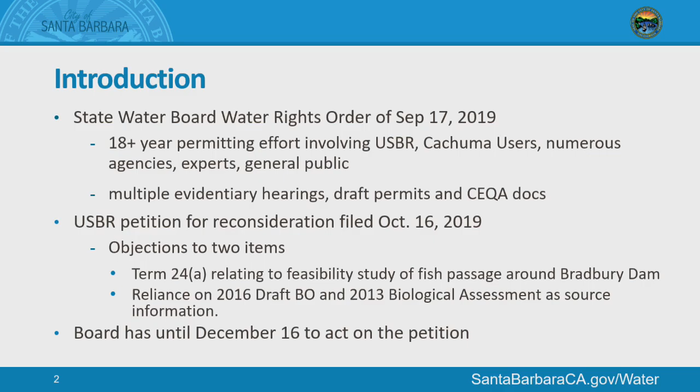You don't want to use something that's really outdated and refer to it as the best available scientific information. There are scientists who disagree that it's the best available scientific information. So the board has until December 16th to act on the petition. Don't know what they're going to do. They may just not do anything. In that case, the time period within which the Bureau could file a challenge would start running.

So let's talk about the operation of Cachuma very briefly. By way of background, the Cachuma Reservoir is operated and has been operated under kind of an existing permit regime as we were going through this 20-year process of getting a new permit. And essentially, we've been operating under a 2000 biological opinion. The dam releases under the existing flow regime calls for water right releases to protect the interests I talked about before, which are the downstream senior water rights, and also fish releases that are necessary to maintain the species according to a particular flow regime.

In the above normal and wet years, which are part of the classifications, additional water volumes are released in order to protect the public trust interests, which translate to steelhead. So that was what they were trying to do. The releases in the above normal water years, and that would also include the wet, have to be sufficient to sustain target flows at two specific measuring points that are downstream of Bradbury Dam.

The amounts are specified in the order, but basically the idea here is that during the periods of above normal rainfall and wet years, more water gets released than would otherwise be released under the existing operating scenario. And why? Why?

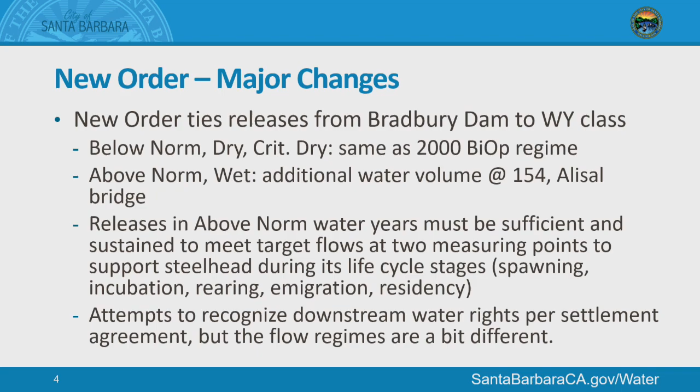So this is the basis of the new order, which I mentioned before was option 5C. And they do a look ahead to a hydrological record based upon water year classifications, as I mentioned before: wet, above normal, below normal, dry, and critical. And what you'll notice is that the water year classification is based upon inflow into Cachuma.

In other words, the amount of water that's fallen on the ground upstream of Cachuma flows into the reservoir, and that amount will tell you what kind of year that is going to be. And it's measured, as I recall, October to October as the water year. I've had that explained to me a number of times, and it gets very difficult and very complicated. But basically, the idea is to capture the rainfall cycle and the dry cycle within California's climate as a statewide basis. So that's the basis of the order.

The flow regime changes, and Commissioner Jordan, or should I say almost future Commissioner Jordan...

These are the purposes of the releases during various time periods, and as you can see, there are different amounts released in above normal and wet years for different purposes. Our fish biologists participated in the hearing and have some different views as to whether or not this will be an effective means of protecting and encouraging the fish. There are differing viewpoints on this, and so the State Board came up with this particular flow regime in order to protect the fish.

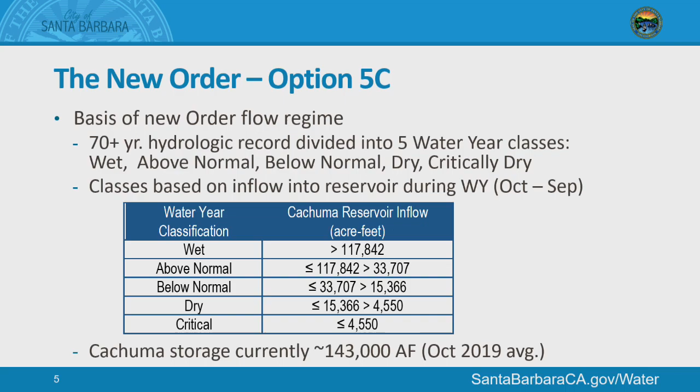Is this measured per day? It's cubic feet per second, CFS, and it's done during those particular release periods for those particular purposes. So if you go backwards, say you've had a wet year where you've had greater than 117,000 acre feet of water inflowing into Cachuma, then the releases during these particular points of the month are based upon that CFS for those purposes.

Do we know what it sums up to in a year, how many acre feet? I'm going to get to that a little bit. They can do the calculations. I don't have that on my chart, but I do have the impact of the total order as modeled by our expert water flow modelers. It's not an easy calculation, I can't do it off the top of my head. If I would have done math, I would have been a doctor.

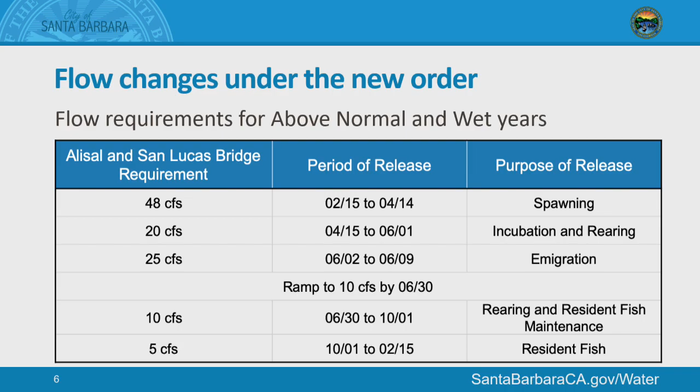A couple more questions. Just a second, we got Dan, a couple more questions. Hang on, just, and this is trivia, but in terms of the measurement, is that a dynamic measurement over the year, or do you basically measure at one point in time and then that regimen goes into effect for the next year? How's the measurement at the bridge versus the release of the water, is it a dynamic thing over the year?

Or is it a one-year measurement which then moves? Do you know, Joshua? If we don't know, we'll have to get back to you on that. I mean, is it leading, static, or lagging? I understand what you're saying. So whatever the year is determined kind of sets this up, and then it would be the following year. Yeah, it's a lagging release. Okay, right, good, thanks Joshua.

So we try to estimate the impacts of this regime versus the existing flow regime under 3C. And the impacts that we averaged over the entire period of the 70-year look forward was about 200 acre feet a year average over the whole period.

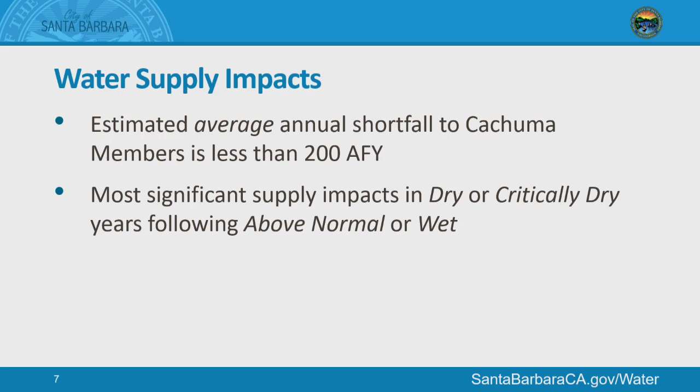Now what does this mean in potential operational reality? Well, because you're releasing more water in the above normal and wet years, you're potentially creating a situation where you're drawing down the reservoir more than you otherwise would. Under existing operations, it stays in the reservoir and can get carried over for other purposes from year to year, and you just have more water in the reservoir. Well, now that water gets released, and there's a potential impact related to if you have a wet year with a lot of releases followed by some dry years, how does that get refilled and how does that get carried over a period of time? And so that's going to be the critical issue as we're moving forward.

The State Board order does keep itself open for adjustments if necessary, and the main provisions keep it open for adjustments to protect fish. But the reality is that if we need to reopen in order to protect people and drinking water, we can do that as well. You go in and petition to amend the permit.

So this is basically just a summary sheet of what I've been talking about. The board order requires higher flows during a period of greater rainfall to improve fish flows. The water supply impacts are going to be the greatest in dry and critical years that follow above normal water years, the above normal and wet years, those two years.

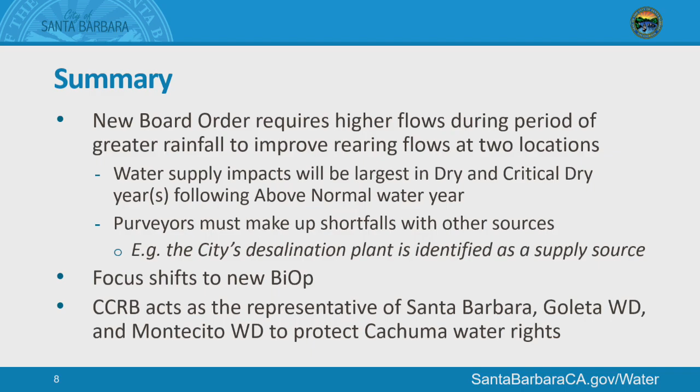They recognized at the state board hearing, and we objected to the inclusion of the reference, that the state board does not have any direct control or permitting authority over that water supply. But that said, it is something that gets taken into consideration when evaluating public trust interests.

A prime example of that is the Audubon case that dealt with Mono Lake and the need to keep Mono Lake full, meaning more water in Mono Lake and less water to Los Angeles. They had to make up for that loss by other sources, including conservation and other water supply activities in the city. That's a traditional public trust analysis, and that's what the board did.

With regard to this, in the course of what I'll call litigation, we do have a JPA that's been organized to protect water rights in Cachuma and downstream of Cachuma — the Cachuma Conservation Release Board. Councilmember Snedden is the city's designated representative to that JPA. The other members are the Goleta Water District and the Montecito Water District. It has a different purpose than COMB.

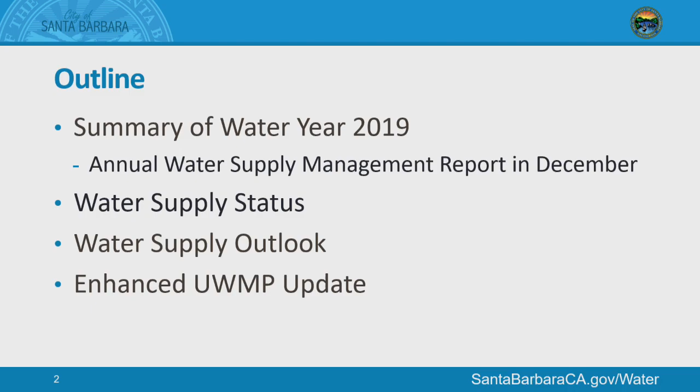Then we'll move into the status of each of our individual water supplies, where we stand right now. From there, we'll take a look ahead three years—where do we see ourselves with water supply moving forward? And finally, I want to provide a brief update on our Enhanced Urban Water Management Plan, formerly known as our Long-Term Water Supply Plan.

Okay, so first, when we're thinking about how we used our water in water year 2019 - again, that was September 2018 through August 2019 - the first thing to consider in Southern California is always precipitation.

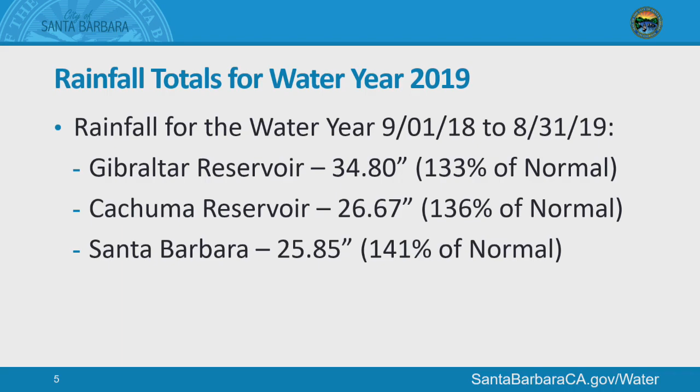So that kind of sets the stage for how we use our water supplies here at the city. This slide provides rainfall at a couple of locations important to the city. At Gibraltar Reservoir for water year 2019, we saw rainfall that was 133% of normal. At Cachuma, it was 136% of normal. And in Santa Barbara, it was 141% of normal. Pretty good year.

This graph shows how we plan to use our water supply sources versus how we actually used them. The bar on the left is our planned, and the bar on the right is our actual usage. The biggest takeaway is that Gibraltar filled and spilled in January 2019, which gave us a source of water we didn't anticipate going into the water year. We actually used 20 times more Gibraltar water than we had planned.

Gibraltar is represented by the gray-blue square. What that allowed us to do was leave a lot more Cachuma water in the lake, represented by the blue bar. So we currently have storage in Cachuma water over 22,000 acre-feet.

As you know, we've been resting our groundwater basins. We pumped them pretty heavily a couple years ago during our critical dry years, and we want to rest them so that they can recover. Desal's been a big help in allowing us to rest those groundwater basins. We had full production for water year 2019 as we anticipated.

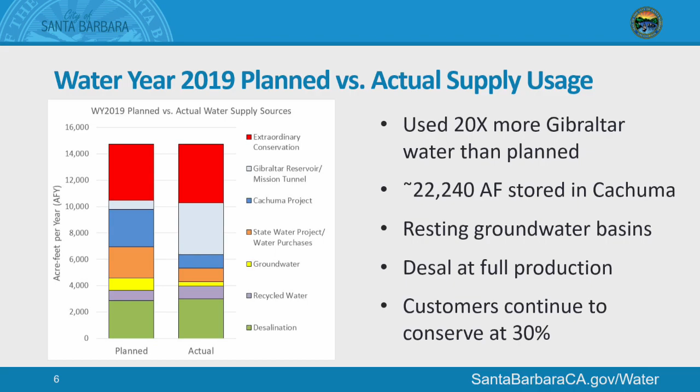I want to point your attention also to the red square, which is our conservation. Our customers have continued to conserve at a rate of 30% of pre-drought, or 2013, demands. That's been critical for allowing us to recover from the drought. So we'll dig a little bit deeper into those demands and that conservation.

I want to point your attention to the red line and the blue line on this graph. The blue line is our drought target, assuming 30% conservation from pre-drought demands. The red line is our actuals, and you can see they track very closely. So our customers have done a fantastic job meeting our conservation targets. You can see in the text that our 12-month running average conservation is 31%.

I want to point your attention to the point on the far right of the graph, above October 2019. You'll see that we also met our target in October for that month. However, if you look at the text at the top of the graph, we had only a 21% reduction for the month of October.

The reason I want to point that out is I'm actually redoing the targets for water year 2020. Now that we're in a stage 1 water supply condition, we do expect our demands to start to rebound a little bit, and we want to anticipate that. So we're anticipating that our demands will be more of a 20% pre-drought conservation versus 30%. Moving forward, that will be our target.

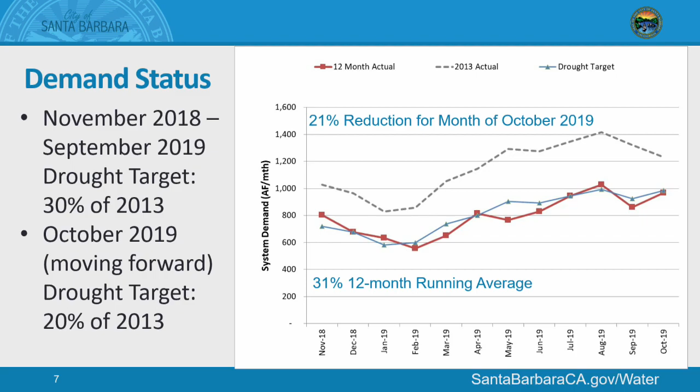Okay, so how are each of our water supplies doing? First, we'll talk about Gibraltar Reservoir. We currently have about 33% of our total capacity stored at Gibraltar, or 1,400 acre-feet. We are continuing to divert from Gibraltar.

The water quality is getting worse, as it does this time of year, so we're seeing increased turbidity and organics. However, it's not all that bad yet, and we're able to blend it with some of our other sources at Cater and produce still high-quality drinking water. We're going to continue to bring that water down from Gibraltar until we reach about 1,000 acre-feet of storage, or until the water quality gets such that we can't use it anymore. As we saw in that graph previously, this has been a really important source for us this year.

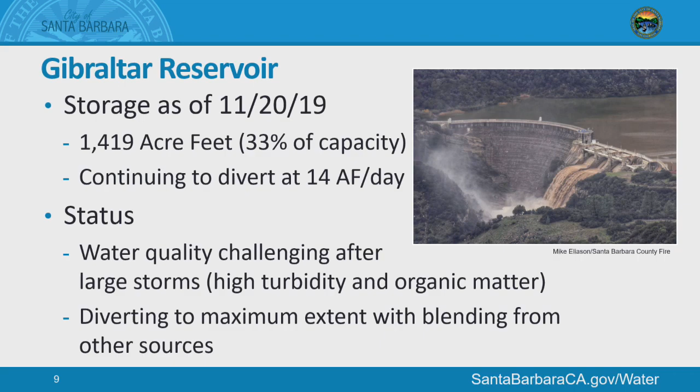As we talked about earlier, we have a lot of water stored in Cachuma. The reservoir is about 72% full right now from total capacity, at just under 140,000 acre-feet. Of that water in the lake, 22,240 acre-feet is allocated to the city. Because we just started the new water year in October, we were given our next year's allocation for Cachuma water in the lake, so our allocation is 8,277 acre-feet. We received 100% allocation, so that's included in that 22,000 acre-feet.

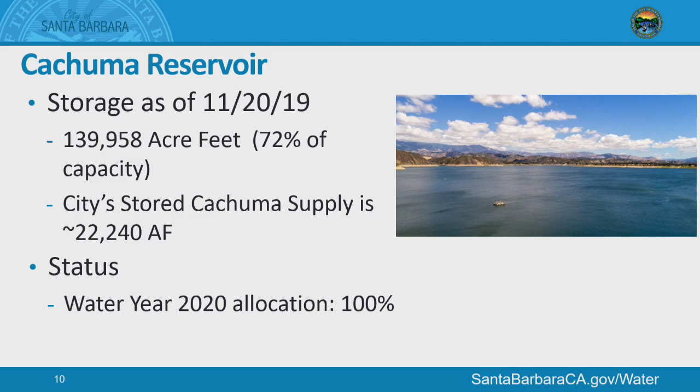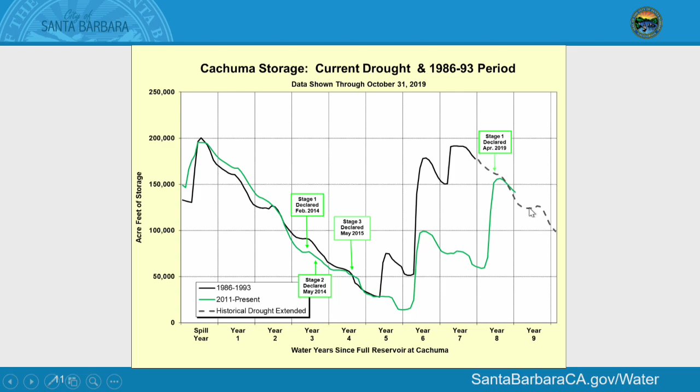In terms of our imported state water, we have a 75% allocation of our Table A amount, which gives us 2,475 acre-feet. Currently, we aren't able to deliver state water to Lake Cachuma. CCWA, the Central Coast Water Authority, is working on building a bypass that will pump the water up and over the dam and allow us to get it back into the lake. They were waiting for materials, and they also had a big shutdown, which was a big workload issue for them. The shutdown is finished, and I believe the materials are in or coming in, so they hope to get that project finished by the end of the calendar year.

We do still have some water debt on the state water project, about 5,000 acre-feet. We've paid back at least 1,200 acre-feet of that water debt, and we'll continue to do so as long as we feel comfortable that we have enough supplies and storage to meet our own needs here at the city.

Quick question. Is it possible to store water in the Santa Ynez Valley in terms of storing it in groundwater and then do some exchange with them, or some trading that could be done?

Not currently. In fact, CCWA is actually doing a study right now on what the groundwater banking opportunities are from the State Water Project turnout near Kettleman City all the way down to Cachuma, so they're looking at what banking opportunities exist. I think there's a lot of promise and hope that we can find some banking opportunities between the State Water Project pipeline and Polonio Pass, the treatment plant for CCWA. So there's a segment in there that would be actually pretty ideal if we could find some storage. But right now that's a study that's underway.

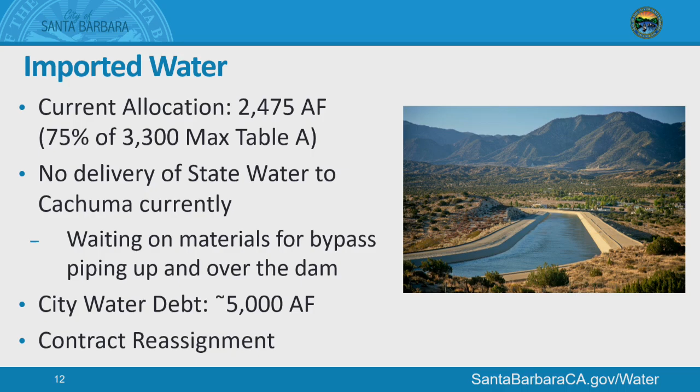One last thing about our state water: we are still working on contract reassignment. Currently the County of Santa Barbara is our water supply contract holder for our state water project water. We've been working through CCWA to reassign that contract to CCWA, and there's going to be a Board of Supervisors meeting on February 4th. The goal of that meeting is to work out any last minute issues in the draft agreement so that all parties can agree to move forward. If that meeting goes well, they expect to have a second meeting to adopt the agreement to reassign the contract sometime after that, after February.

For groundwater, as we've mentioned before, we are resting the basins, so we haven't been pumping our groundwater basins. We do continue to monitor seawater intrusion in our storage unit 1, and water levels in both storage unit 1 and Foothill, on a monthly basis. We expect full recovery of the basin to take up to 5-10 years based on our previous observations in the last drought.

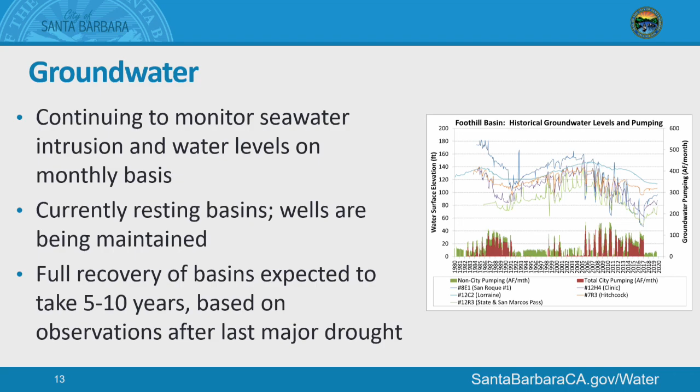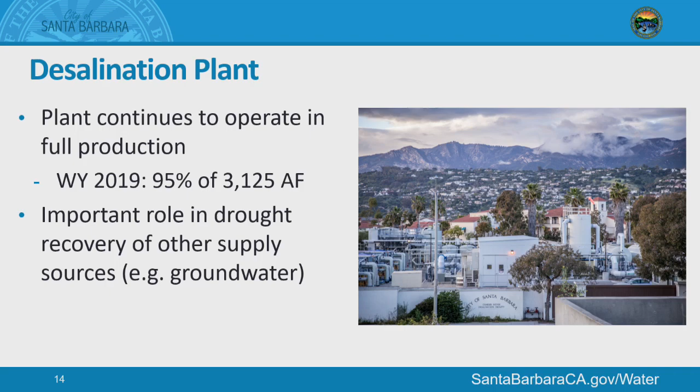Our desal plant continues to operate in full production. For water year 2019, we ended up with about 2,993 acre-feet, so 95% of the anticipated production amount of 3,125 acre-feet. Desal continues to play an important role in drought recovery because we have this consistent, reliable source of water, and we're allowed to let our groundwater basins rest and recover.

And finally, the recycled water plant is currently online and it's meeting our customer demands. We just finished a series of repairs and fixes to increase the capacity of the recycled water plant, and staff is actually currently load testing the plant to see what the new capacity may be after these repairs. So we hope to have more information on that soon.

We expect probably in early 2020 that we'll have that. We want to do probably at least 2 months of stress testing, and we're doing different capacities or different flow rates and obviously different types of cleanings to kind of optimize that. But hopefully at the end of this, we'll have an upper number of what we think the facility is available, and then what capacity may be available for sale if we want to go that route.

All right, so next we'll move on to the water supply outlook. As you know, at the beginning of the water year, we always assess our water supplies and we take a 3-year outlook. The idea with this assessment is that we're looking for a feasible worst case scenario. So we had a pretty good wet year last year, but what if we go right back into dry years, 3 consecutive dry years? This is a conservative planning effort, and the idea is if we were to encounter 3 more years of drought, would we have enough supplies to meet demands for our community?

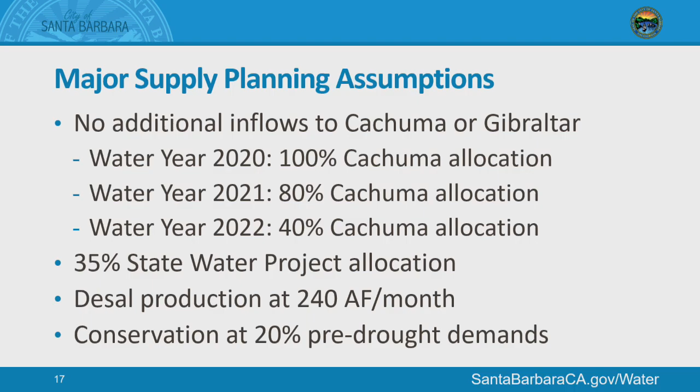When does that pre-drought baseline ever move down? We start out somewhere, we're where we are now after a wet year. You make the point in the staff report that if we have a couple of wet years, we never go back up to pre-drought demand. Do we then, at what point do we bring that line down for the new pre-drought number to start measuring conservation off again? That's one of the questions that we hope to answer as we work on the enhanced urban water management plan.

We have done some work with some consultants to evaluate what we think the rebound's going to look like, and their efforts suggest that we won't ever return to pre-drought demands. We think it'll be 10% less of pre-drought demands, and that recovery period is probably about 7 years, so we'll kind of slowly creep back up to that 10% less period.

And then we'll take what we've done with them moving forward into the long-term water supply plan and define a new normal. So when you do that new normal, then that 20% will erode down a little, to 15%, and then we'll work on increasing the conservation level back up off of the new pre-drought number, so to speak. Does that make sense?

It's tricky with conservation, especially in our community because they're so fantastic at conserving. At some point, there's demand hardening, and there's not much more water you can squeeze out. Could be actually that way in the future as all the easy pickings and the lawns disappear. Exactly. You end up with less potential out there to try and maintain the same conservation level. Yeah, so at some point, whenever, if the world continues the way it is, those two lines come back together, and then we've got some real hard issues again on how to conserve off of the new reality. That's correct.

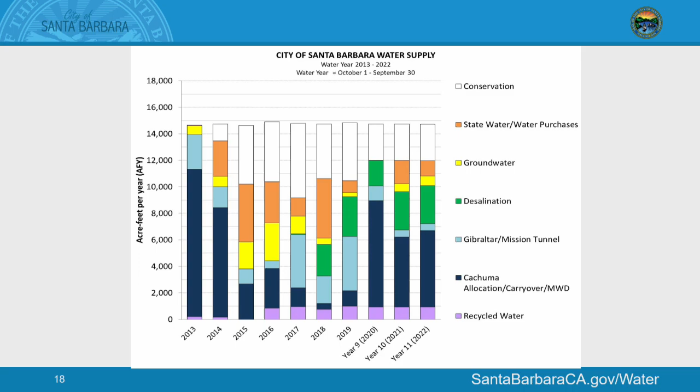And the mix looks pretty similar. We'd still be relying heavily on Cachuma and desal, a little bit more state water, and we'd still be using just a little bit of groundwater in the summer to meet peak demands.

So we did speak with the chair and vice chair about this, and we're still working with this graphic. We do want to be clear as we move forward about what water the city, if this agreement were to be signed, would have control over - how the city supplies water to its customers - versus this water that we're now obligated to provide. But this graphic clearly shows all of the demands that the city has. So we're working on how best to portray that information and have that conversation with the community as we move forward.

Just a quick question - on 2022, does the Cachuma allocation go up from what the previous graph showed, or no? I couldn't tell, I don't remember. There's a little bit more Cachuma water used in 2022 in this graph than in the other.

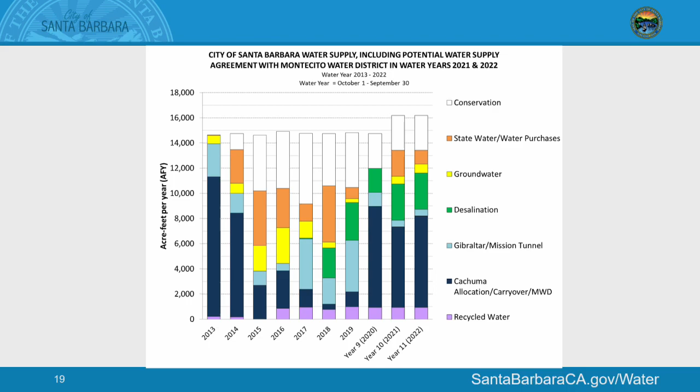Right, because as we get into 2022, much of that water is carryover from prior years. Thank you, that's correct. Okay, so our conclusions after going through this supply planning effort, as I said earlier, we do have sufficient supplies to meet demands through water year 2022.

Some important things to consider: I didn't include desal expansion to meet those demands, and I also didn't include any supplemental purchases of the state water project. So should things get even worse than my worst case scenario planning, we're not totally stuck. We have some other options available to us, although there's some lead time, of course, to expand desal.

We also have sufficient excess supplies to meet demands of the water supply agreement with Montecito Water District, should it be approved. And then finally, we wanted to address the current Stage 1 water supply condition. We think that remains appropriate because our groundwater basins still have a lot of recovery left, and we'd like to keep that in place. After this next rainy season, we'll see where we stand, and we can revisit that in the spring of 2020 and see if it's still appropriate.

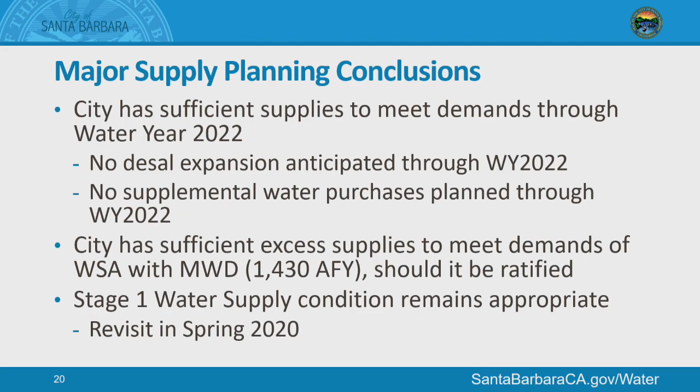So, yes, Arturo, a couple of questions. The first one is: where do you see Cachuma being at the end of those 3 years with your assumptions that we get no more water and we're drawing all this down? How much would we have, roughly, in terms of our availability, allocation?

I believe that we were down to a couple thousand acre feet of Cachuma water and virtually no state water. So again, this is a worst case scenario, and I did really drive those sources down.

Okay. And then the second question had to do with conservation. So now we're not in Stage 2, we're in Stage 1. But do we still continue the conservation programs in terms of incentivizing people to continue to conserve lawns and things like that? Yeah, absolutely. All of our conservation programs are still in effect.

And those are always implemented based on the avoided cost, so it's still cost effective for us to implement those programs. We've still got field staff going out and helping people figure out where they've got leaks. We still have rebates available, and those programs will continue.

I think one of the things we were challenged with as a commission as we got into this is conservation is a way of life here, that is normal. And when the drought started, we had been talking about enhanced conservation. Maybe as we go through this update to the Enhanced Urban Water Management Plan, it's trying to clarify what that is that we're asking for the community—an effort above and beyond what we consider to be a way of life here, which is always being sensitive to your use of water, but then taking it to a whole other level when we get into these long, prolonged drought periods.

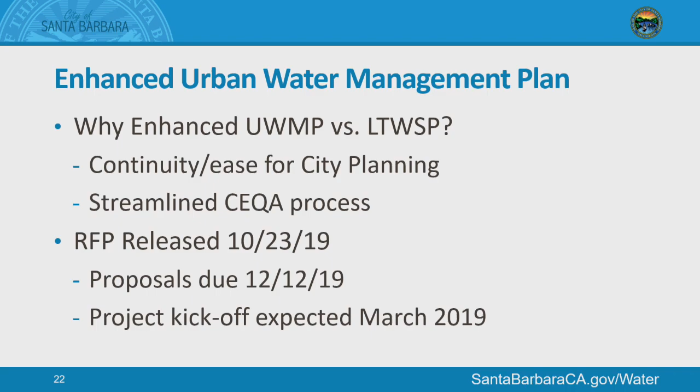I'd be interested. I'm not going to be here next meeting, so I might as well say so. Oh, okay, great. I am too, but if there's one, I'll let Dr. Keller do it. Are you interested? I would do it too, but however it shakes out. Okay, let's talk about it at the next meeting.

Great, all right, and that actually concludes my presentation. So if you have any questions, I'm here to answer them.

I should have a couple comments back, really to the last section, and Joshua's heard this from me before, but I'd continue to be interested in whatever process discusses getting rid of that white section at the top of the bars and having a new normal. Because what's really concerning to me in 10 or 15 years is what happens when you have to start conserving into today's demand, not yesterday's demand, which is still what we're showing at the top of those bars, and what will those look like, and can you plan for that?

And the other one is, do we ever discuss, or do you ever have a plan, that use of groundwater is the last choice in the water supply? If demand doesn't reach where you projected in the other sources, so you have an excess of, say, desal, would you get rid of those yellow ones as the first source to go in subsequent years? Is that something we consciously do, or care about? Yeah, the 7 to 10 period while we're recovering.

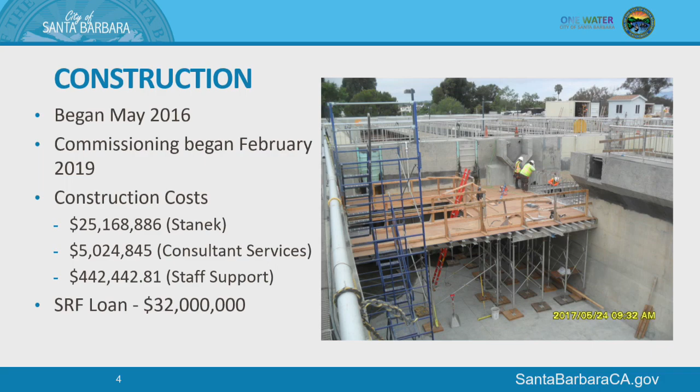So the project goals were really to change our process.

We went from carbonaceous mode to a nitrification, denitrification mode, and with that we wanted to address some issues and distribute flow equally into all of our basins. That was one of our hang-ups, we never could distribute flow equally.

So the picture here is what we call our octopus. That helps us really closely monitor the gate so flow can be distributed equally throughout all 6 basins.

We also had to upgrade a lot of our existing equipment, because our equipment is old and failing, or it's no longer efficient or obtainable. We had to buy a lot of our parts on eBay and really just try to hold things together.

So we also wanted to provide redundancy in areas that we were lacking and were kind of at risk. This project also addressed any odor control issues that we were having. With the nitrification, it really cut down on a lot of the odors in the primaries.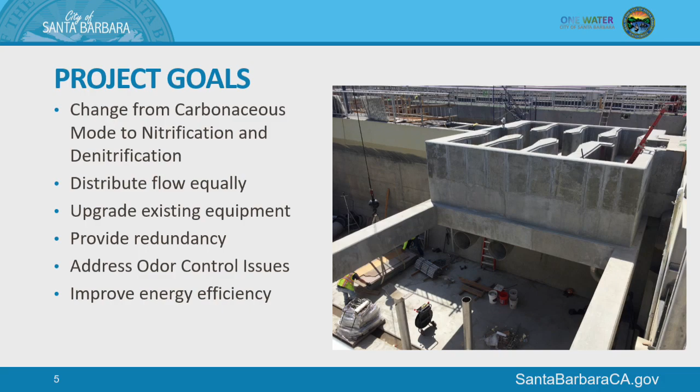As a fun fact, the blowers are the single largest users of energy in our wastewater treatment plant. The need for constant and significant air to keep that dense biological activity going is significant, and they were a significant cost as well. They were a million dollars each, so yeah, they're pretty impressive.

Operations, all right, this was a very successful project. We improved our turbidity, the clarity of our secondary effluent to 1 to 3 NTUs. That has a significant impact to our tertiary operations, and because of that is why we're able to do the testing at tertiary right now to see how much we're able to produce. It also obviously improved our flow to our basins, which helps us treat and process equally throughout all of our basins as we take them down for maintenance or as needed.

The turbidity here is on par with what we see from Gibraltar and Cachuma under normal circumstances. So we're getting down to that kind of water quality, which is exactly what we need for future potable reuse efforts.

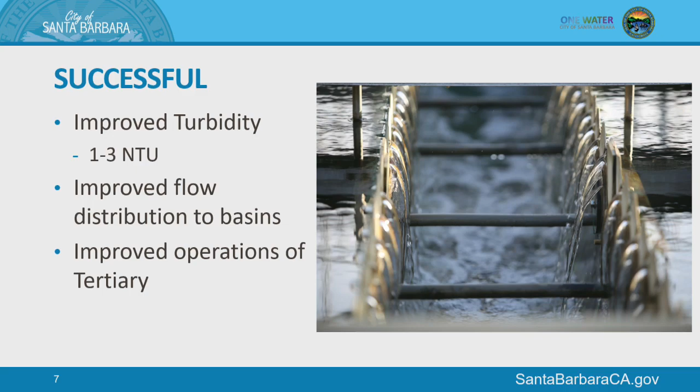So water bears, basically I think of water bears as in the apocalypse, water bears and cockroaches are gonna survive. You can burn them, you can boil them, you can freeze them, you can starve them, you can zap them with radiation, and I think of them as a roly-poly. They just kind of curl up and hibernate. That's their defense mechanism, and then when they feel safe, they'll just unwiggle and they'll be resilient.

But they are found in a really sustainable and resilient effluent water now. And so because we have increased our sludge return rate, we're able to produce these water bears in our system.

So right now we're optimizing the process. When you have a big project like this that touches everything, there's little nuances to the project. We're sealing our aeration basin gates. That was in the original design, but we kind of took it out because our operators were a little nervous about going to the new system. They were actually very, very nervous about going to the new system, so they wanted the aeration basins to allow them flexibility of operating.

Now that we're in that new system, they're fine with it, and we can seal up the aeration basin gates. We're raising some of our other gates, and now that we've switched the process, we have some dead end zones, so we just don't want standing water in there. We're going to seal them off and reroute some air piping. Another thing we're going through is seasonal process changing.

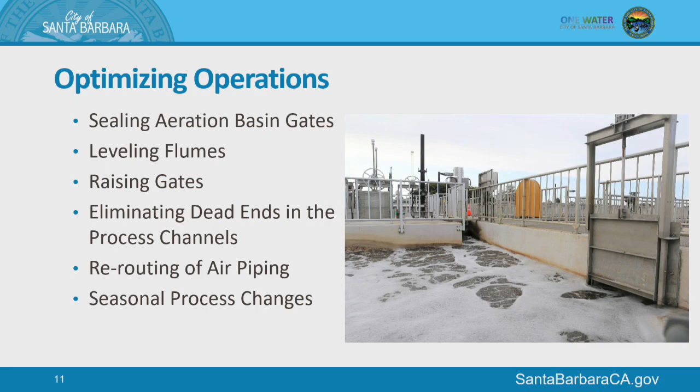This is our first year and our first winter, so we got through our summer and it was pretty great. Now we're starting to realize that colder weather is coming on, so we've extended our SRT days from 8.5 to 10 to move up some of our numbers. We're just trying to make small process changes to see what we need to do in the summer versus the winter, and that's kind of what we're working with this year. So we'll get a whole season in and see how everything works.

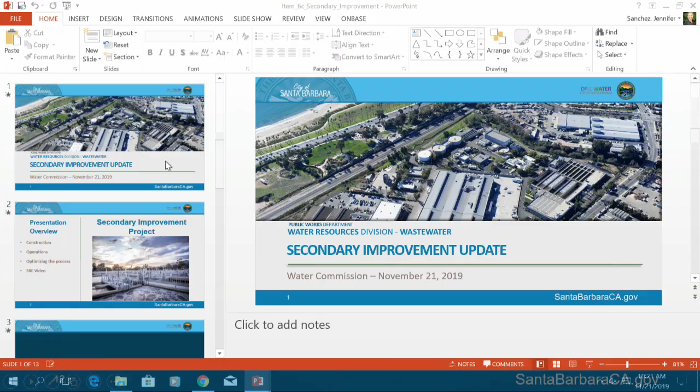Hopefully get kind of a routine with everything. So for those who got to watch the video, this is about 10 minutes, but we'll play a small portion of it. We're hoping there's a lot of good video content here and detail. We're hoping to turn this into something a little smaller, more public friendly.

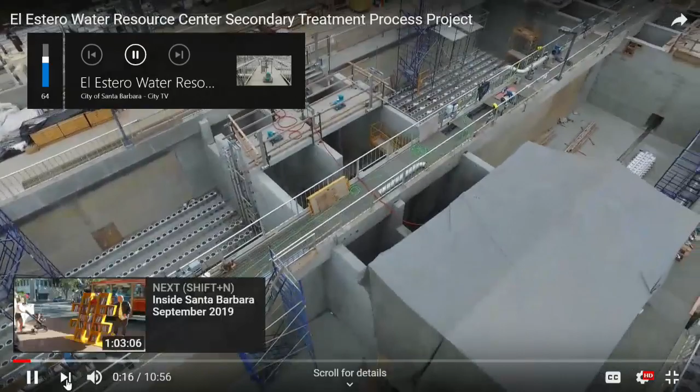Check right there in the corner on the bottom. Oh, there it is. So, if you want to pause it, we can. No, wait, I wasn't going to show this part anyway. But this will give me... You can just talk.

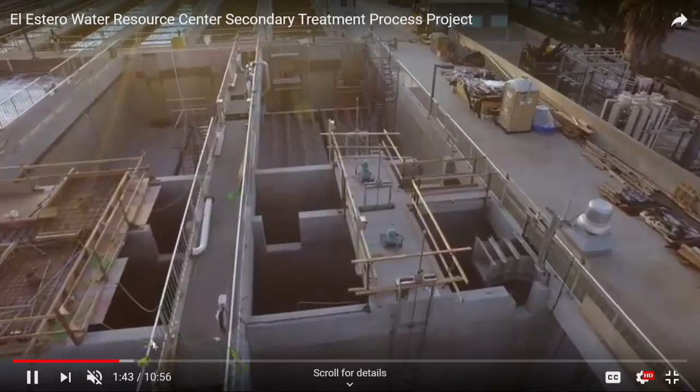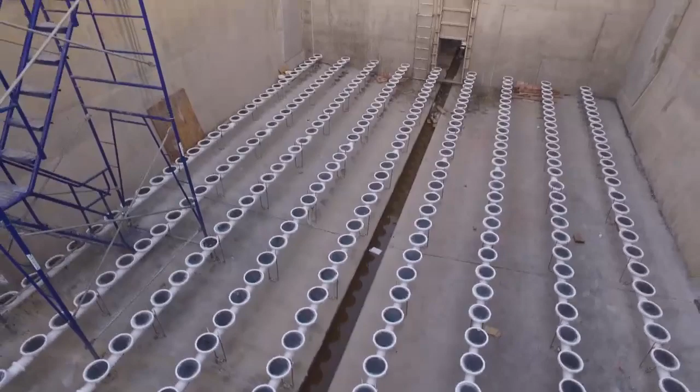So I wanted to just kind of go through the construction. All of these basins were completely clear. We put in all of these new diffusers and put in aerobic and anaerobic zones in our basins, all 6 of them. So that took quite a bit of time.

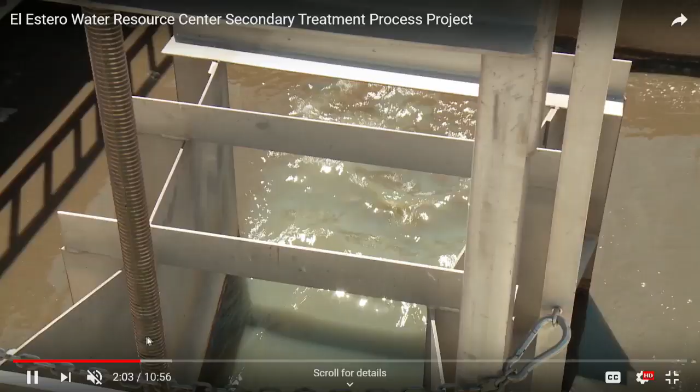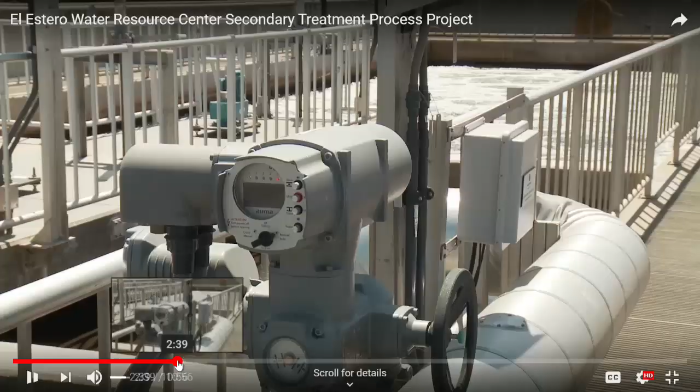I can't... It is. Nope, the computer's probably muted. Oh, get in there. Yeah, so.

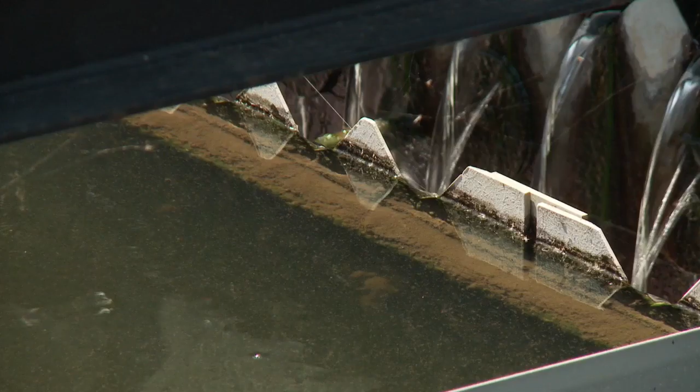When we did our final check with the SRF people, they asked that usually you do an end report. They said, well, if you want, you could submit a video or pictures or something they could submit to their board, because that's probably a little bit more interesting than a report. I had no problem, I was really excited. We used City TV, and they came up and we wrote a script for them. So this report is definitely for the SRF and the Regional Water Quality Control Board.

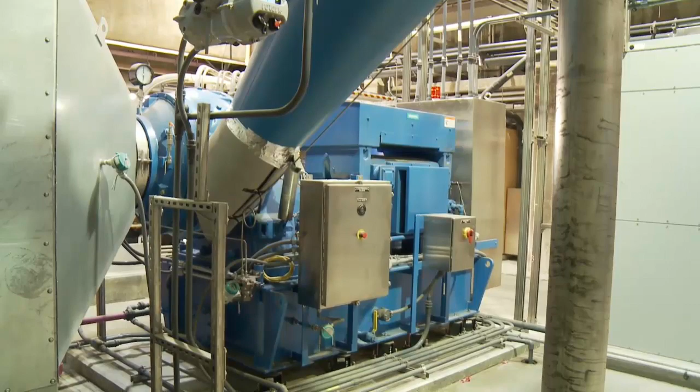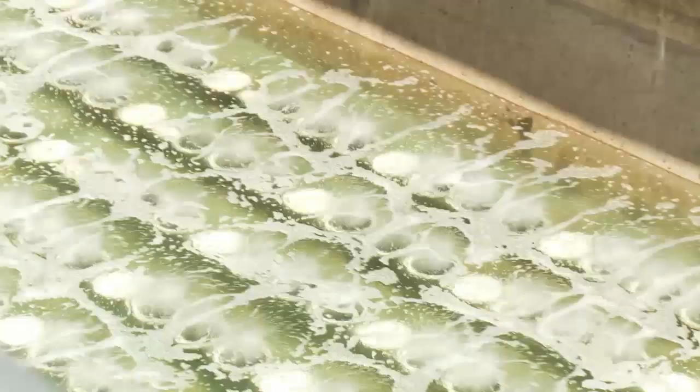But what Josh was saying is we were really excited about this, and we want to make it more user-friendly and narrow it down to about 3 minutes. We're currently working on that, and we have to write a whole new script and edit everything else out, so we're hoping to bring that to you probably in about February. And then I got really excited, and I want to do that with all of our treatment processes now, and put it on our website because we have the processes broken out.

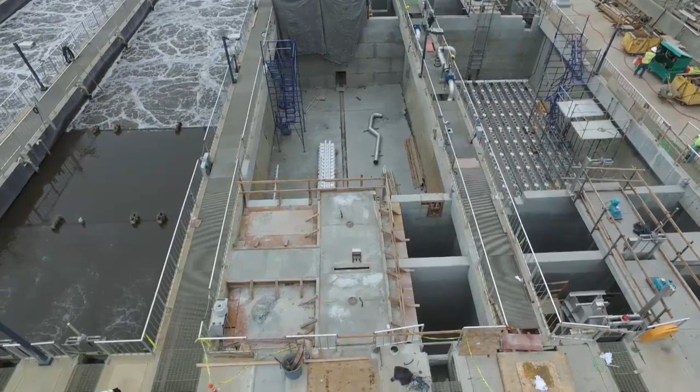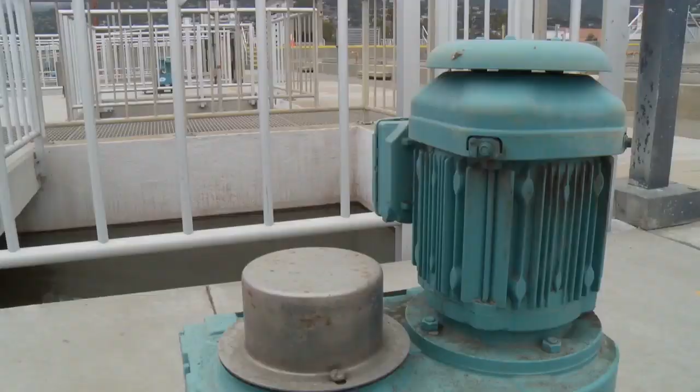And if, instead of just pictures, we could do a little snippet, a little video at 2 or 3 minutes, we're hoping to share that in our education program. Our water supply has a great outreach with schools, we give a lot of tours, and to give them kind of a background of the wastewater treatment plant maybe before they come in for their tours. We just really want to get it out there and provide more education for everyone, not just the technical folks, because this is very much a technical video.

But did you find it? Oh, look at that. Thank you.

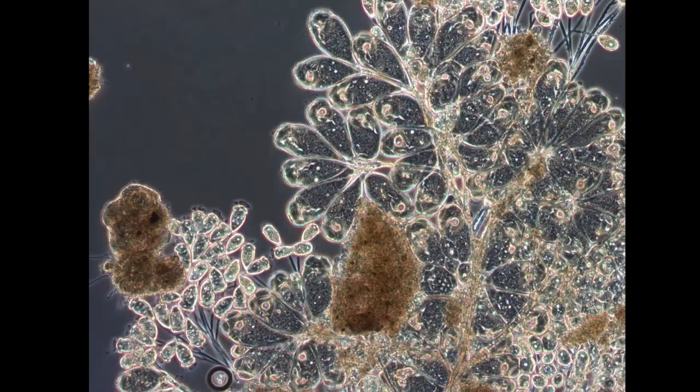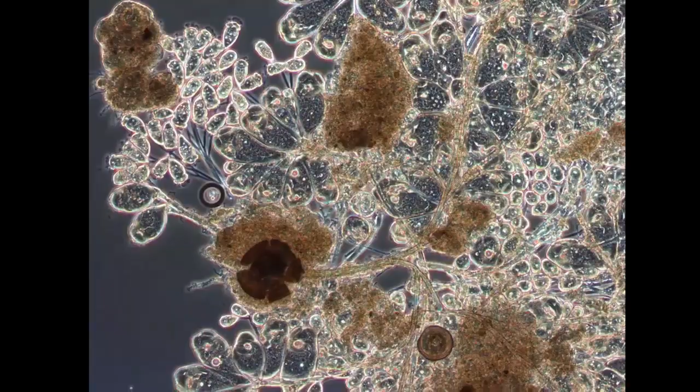So we're looking to do something similar here because there is a lot going on, and it's difficult to talk sometimes over blowers and other equipment. Yeah, so...

But I just wanted to share that with you and bring it to you and kind of celebrate the team. It took a lot to get to this point, 3 years, and it's pretty exciting, and we're kind of excited. I know that Phil will be presenting on the electrical, but I don't know if you guys ever get a wrap-up of projects. So you always get the beginnings and the problems, and so I want to bring a good story of teamwork and what we've done.

Thank you so much, Amanda. Any questions or comments? I do think you should. Oh, yeah, go ahead.

And you should talk to your social media people, that whole wastewater treatment plant versus day spa thing. Do like an Instagram side by side and let people vote. It would be pretty funny. I think people would get it wrong. You might have to be a little careful with the water bear, though that one they might get right, but I don't know for sure. There are some great basin shots with the sunsets, and I would pick a day spa, I would totally pick it. Thank you so much. And yes, I want water bear T-shirts.

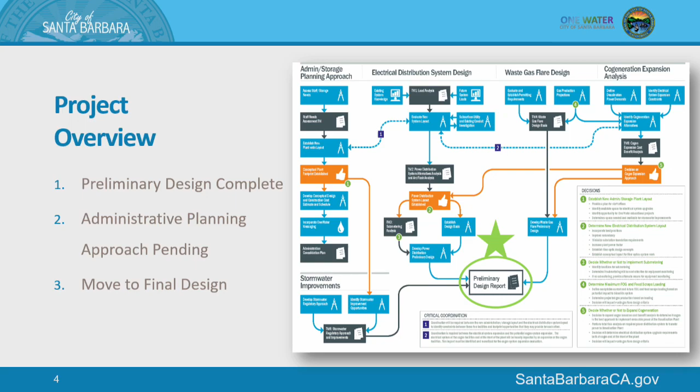So some background on this facility and the need for this project. The existing electrical distribution system and substations are all original 1970s construction, except of course for the secondary process, which was just upgraded.

It's past the end of their useful life and susceptible to catastrophic failure. The electrical system supports all of the other systems within the facility. The critical nature of this system, combined with the risk of failure, continues to make this work the highest priority for maintaining the facility.

This was accomplished through the development of 3 key technical memorandums. The first was a load analysis. The second was a power distribution system alternatives analysis, including consideration of construction sequencing. The third was a sub-metering analysis. There are also 4 additional supporting tech memos that helped inform project scope decisions: the waste gas flare evaluation, cogen analysis, administration planning, and stormwater compliance. We'll discuss each of these in the next few slides.

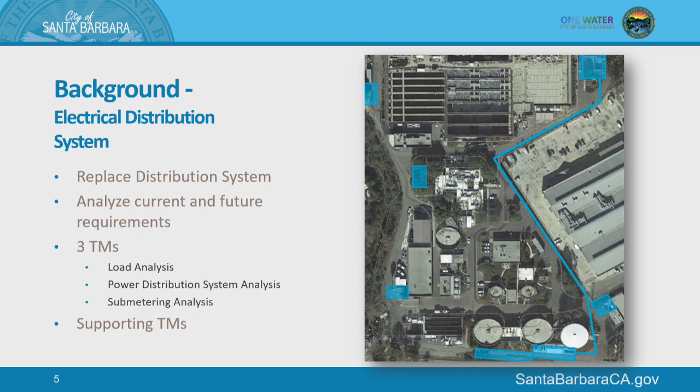So first, the load analysis. The load analysis reviewed all of the existing facility needs and estimated future needs. The analysis determined that there is sufficient power supply to meet anticipated future needs, and replacement of the main distribution panel and all substations in the distribution system is required. A second main power feed can also be incorporated into the design to eliminate a critical single point of failure.

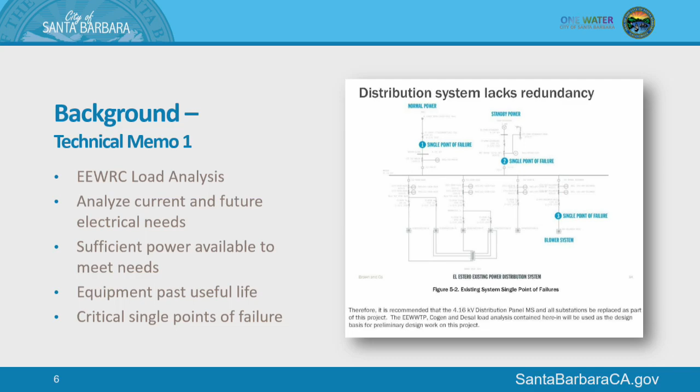Is this where alternative renewable energies were also considered? Absolutely. Part of replacing the primary power feed is allowing for opening the system up to additional feeds to support additional renewable energy.

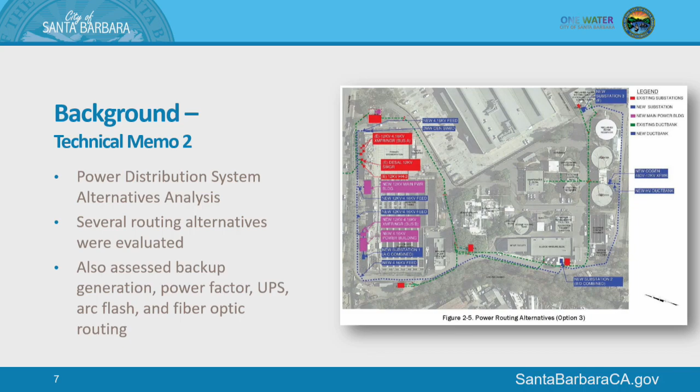So the next tech memo, the power distribution system alternatives analysis. Several alternatives were analyzed for this. A parallel routing scheme was selected to allow for installation while maintaining functionality of the existing system. The 5 existing substations will be reduced down to 3, and the replacement power feed and main distribution panels will be installed in parallel, with some existing components remaining. That's how we will eliminate those single points of failure at those points.

The submetering analysis evaluated the monitoring needs to better manage the electrical distribution system efficiency. The analysis recommended monitoring all major subsystems along with the main power feeds, and this recommendation will be incorporated into the final design, just for greater efficiency and control over the system.

This will be really helpful in being able to identify potential problems as they start to sneak up on us. Maybe if something's backflushing or having to, I don't know, potential issues coming. So I think having this submetering will be really helpful.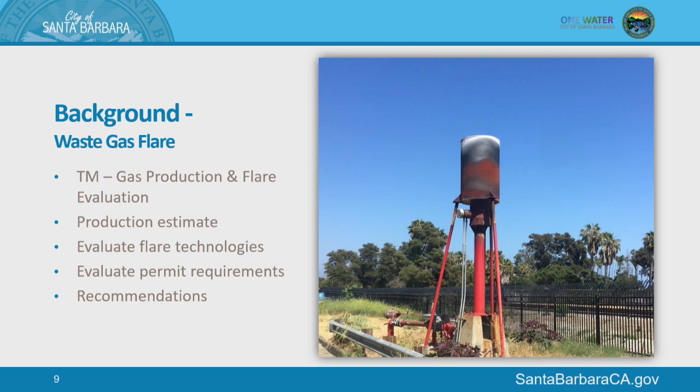The cogeneration analysis. As just mentioned, the current infrastructure needs to expand for additional gas production. So this tech memo evaluated what infrastructure is needed to accept additional process material at this facility.

This included alternatives using 3 digesters and alternatives using 4 digesters to process materials. Each alternative added significant capital cost with minimal annual savings. This analysis showed that major expansion is not viable at this time. The current facility plan is to install a 3rd digester with future demands and funding.

So the electrical system is planned for design with this future expansion in mind. That being said, the assessment will remain as a good planning tool for future needs as they are considered.

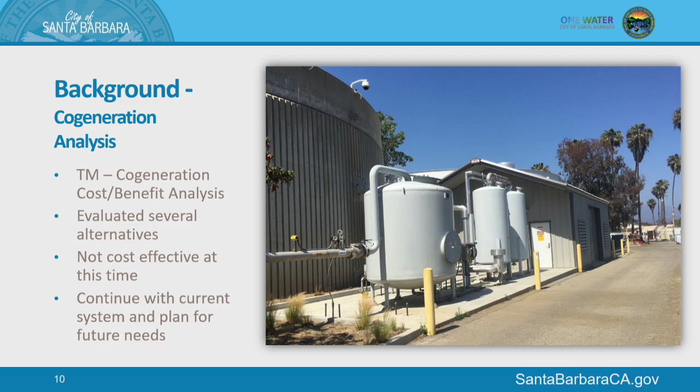Stormwater compliance. This tech memo reviewed and outlined approaches to meeting the needed stormwater improvements required by a project of this type. The city's consultant reviewed existing regulations, compared past applications the city has installed with other agency projects, and developed conceptual applications to meet the needs of this project.

At this point, the design team has good direction for installing infrastructure to meet the permit requirements for best management practices. Yes, sir.

What is that? That's soon to be a bioretention basin. It was one that was installed with the secondary improvements. Again, may not be that intuitive. You're doing work on a core part of the process, but there are these additional requirements that this facility has in order to manage stormwater. So when you do improvements like this, that is necessary.

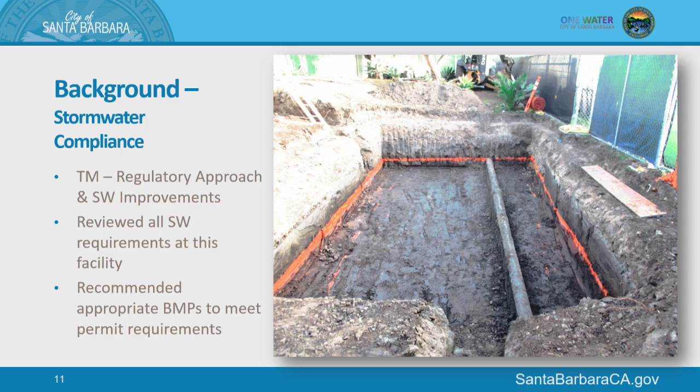For the most part, all surfaces within El Estero flow to the headworks. So whether you get tracking of material on site, it all goes back to the headworks for treatment.

Administration planning: this tech memo evaluated all stakeholder needs at the facility, calculated storage requirements, and presented alternatives to support decision making. We found that the costs of expansive renovations quickly outpaced the planned budget, so direction was given to constrain the scope within the existing building footprints. This constrained scope is being finalized now, but has already informed the electrical project sufficiently to move forward. The final administration project in totality will be planned with future budgets, so it's not part of the electrical final design.

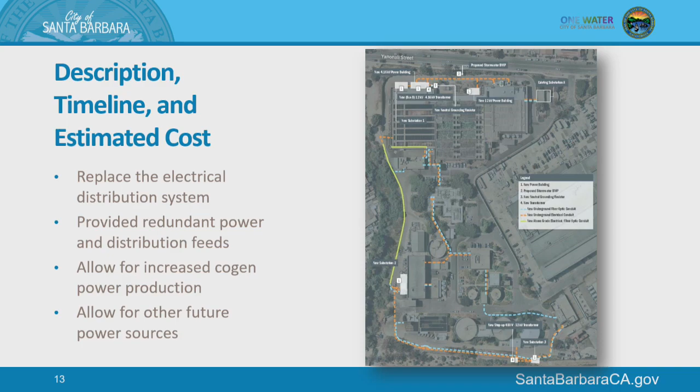Speaking of electrical final design, what are we doing for the final design? Final design will focus on generating plans for replacing the existing electrical distribution system. It will eliminate those critical points of failure within the system, and it'll allow for increased cogen power production and other future power sources, as Joshua was mentioning, when they become available. That's encompassed in the plan.

What does the project timeline look like? This is where we're currently at, with final design highlighted. The gap between final design and construction is to allow for award of the Clean Water State Revolving Fund loan after final design has been completed. We're submitting an application for the SRF loan this year, but in anticipation that it may not be at the level acceptable for the state, we will gain more points when we are near final design.

I wanted to add one thing before we kicked off this project: given the choreographed dance that needs to happen to make this happen, we're kind of frustrated by our bidding process. In an ideal world, with the complexity of this project, I would like to have brought the contractor on during final design so they're part of that whole dialogue as we go through it. Unfortunately, our municipal code, our charter, kind of restricts us from doing a process like that, which is unfortunate, but it adds more difficulty, because you can put all this great information in a spec, but transferring that to a contractor is tough.

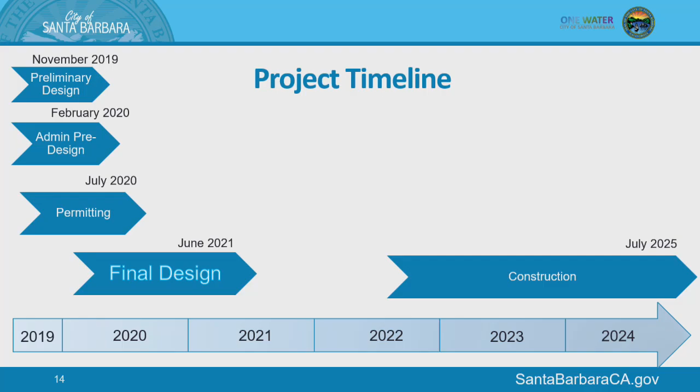And so this is what the final design timeline looks like. As you can see, we'll be at or near 90% design by the end of the calendar year, which is exactly where we need to be for the SRF loan application. We do have a good length of time to incorporate a lot of the construction management coordination Joshua was talking about, and make sure that gets input into the design as best as we can without actually having a contractor involved in the process.

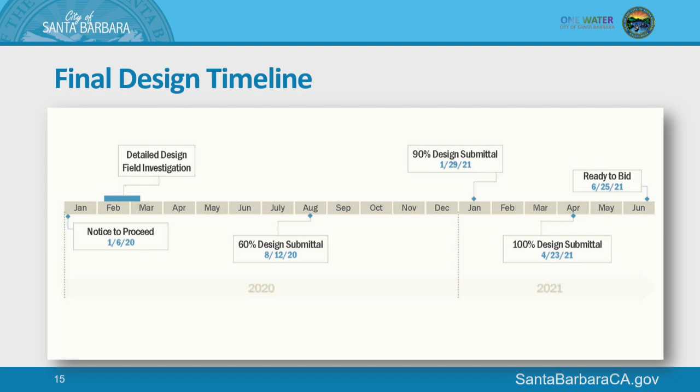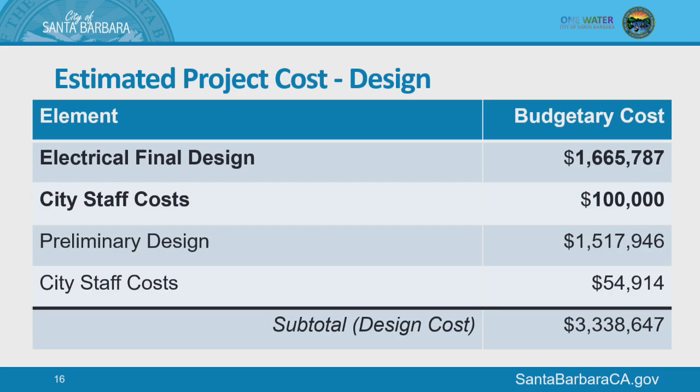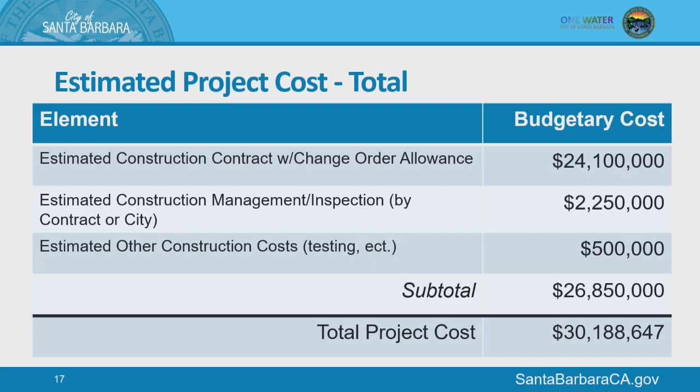Here is the estimated construction costs and total project costs that we currently have. This is drawn directly from the preliminary design report we've just recently finished. As you can see, total project cost is nearing, slightly exceeding, that $30 million mark, putting it on par with the secondary project that was just done.

So for project financing, like I'd mentioned earlier, the Clean Water State Revolving Fund is the preferred source, and it is the avenue of funding that we are pursuing. It comes at the lowest cost for the ratepayers, but it is not the only way to fund this project. There are municipal bonds that could be pursued in order to do that.

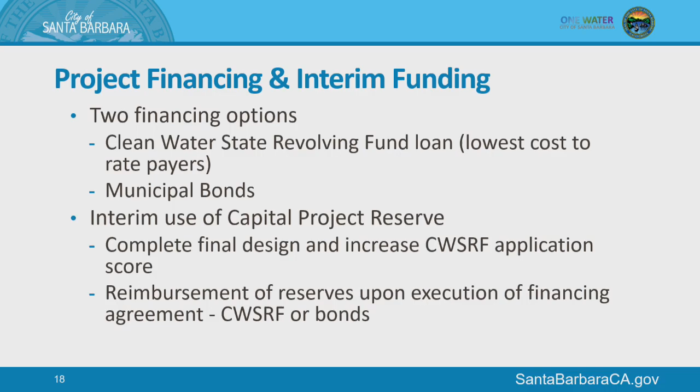And the current interim use of capital project reserves is to complete that final design. So let me just take a break here. This is the part that when we initially started this project, we knew we wanted to get it going, and so we funded the preliminary design, which is like the $1.5 million to get this rolling using

we call PAYGO funding, available capital funding to do that. But we had anticipated that we would have a state revolving fund loan to help fund this final design and then into construction. And unfortunately, I think we've had some discussion on this, but the challenge is the Clean Water State Revolving Fund loan is impacted. There are just too much demand for that money and not enough funds there. The state has done a great job, and the feds have done a great job funding the drinking water side.

There's no line there. Like if we had a project, we could get that money in a year, which is great. But they unfortunately haven't really kept up with demands for this, and to that end, there is a waiting list of sorts and a priority to get it. And we did apply last year and fell short of the points that we needed, and part of it was they wanted to see us further along in our design before they were to provide us funding.

And so we've gone back and forth with them over the last year, and they're like, you really need to finish final design in order to get the points that you're going to need to get funded. And so that put us in this catch-22 of what do we do? And so we are recommending to move forward with the use of capital reserves.

So this is going to take us below council's policy on our reserves, and it eventually gets us down pretty low. We carry about, was it $9 million in reserves. $4.5 million of that is what's called capital reserves, and so we are anticipating drawing all $4.5 million, close to, which basically wipes out our capital reserves.

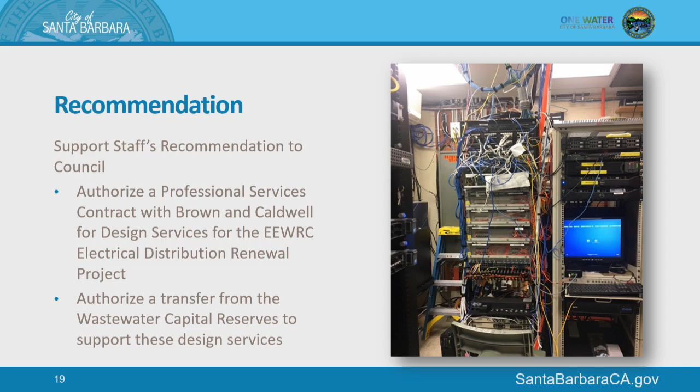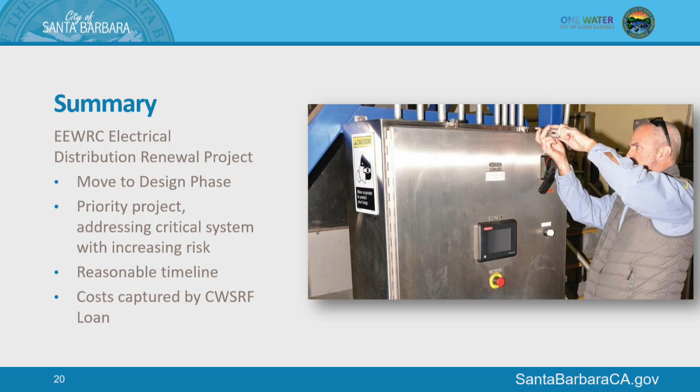And so that brings me to our recommendation. We are asking for support in issuing a contract with Brown and Caldwell for design services, as well as drawing from the Wastewater Capital Reserves Fund in order to do so. In summary, we want to move forward with the final design. It's a priority project addressing a critical system with increasing risks. The timeline can be reasonably maintained, and the costs are anticipated to be captured with that Clean Water State Revolving Fund.

Thank you for your time.

Oh, just had one last question. If we apply for and get the SRF loan in 2021, would we apply for the full $30 million? Yeah, we plan to do the whole $30 million. And what happens is, that's why we're going to dip into reserves, but once we get the loan, we can immediately turn around and submit for reimbursement on the preliminary and final design costs, which will get back and replenish reserves. So that's kind of the mindset on digging back out of that hole.

Just a minor question - I had questions on the administrative elements here, which in the report I didn't understand, but in your presentation I totally understand it. So my suggestion, just a suggestion, is on page 2 in that paragraph, you might clarify that as you did here today before it goes to council. Thank you. Oh, absolutely, thank you for that feedback.

Go ahead, just keep going. Just had a question on your comment about the challenge of having to carve out 2 RFPs, splitting up the projects rather than involving the eventual contractor now. I get where that makes a better project, but does that also translate to the construction contractor charging you less because they were involved earlier? Is there some savings or efficiencies involved with that too?

The mechanism is called CM at risk, or contractor at risk, is the mechanism that some special districts and others can use, in which you basically sit down and it's open book pricing.